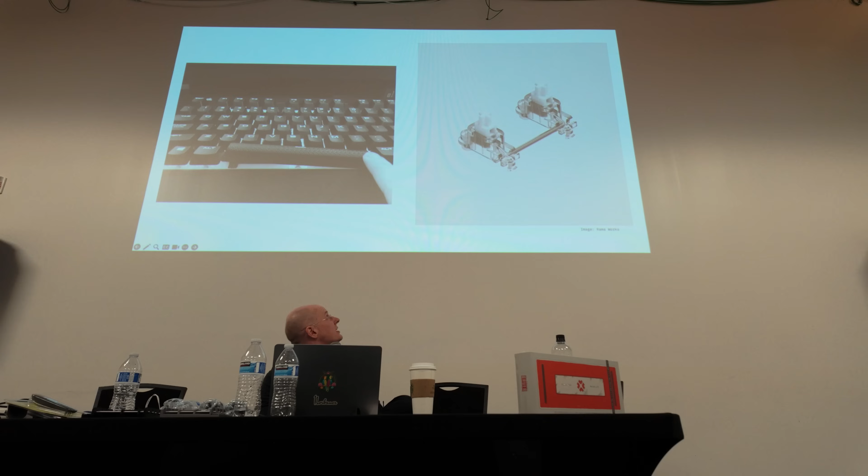So, stabilizers are problematic at many levels. The one in which they're not particularly problematic is just the simple, they do perform their core function, which is anti-seesaw, right? So we have these keys under the ANSI standard, some of which are longer than others. So the non-alphanumerics, like the spacebar, if you were to press on the far end of it, you would get this sort of seesaw effect unless we had some mechanism to counteract that, with the switch in the center acting as a pivot.

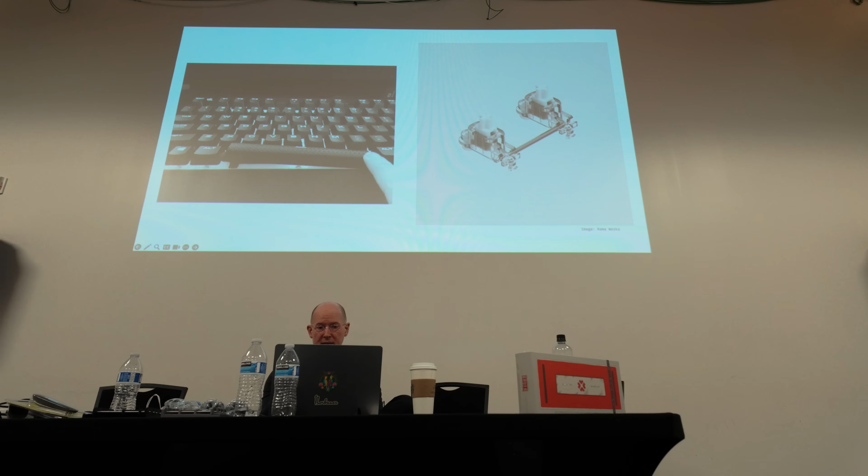And so, there are a number of solutions to this problem. The kind of standard one is this. This is a rendering by RamaWorks of their attempt at an improvement, but it illustrates the basic concept on the other side here of how stabilizers solve the problem. They use a wire linkage between two sliders that plug into the spacebar, and they pull down the other side in tandem with the long end.

And so the problem, as I understand it, and I think about it, is not performing the core function, but merely that they sound really bad. And I think this is the perfect expression of that. Oh, come on. Right? So this is a video that's been viewed millions of times, and it's by our colleague and friend Nathan Taeha here. And it's about what stabilizers sound like in their unlubed, natural stock state. I think all of us kind of feel this way, which is, they rattle and they sound really bad.

And so there's this core irony at the heart of super high-end luxury keyboards. You can spend many thousands of dollars for a Keycult board or these other rare things, and they have all sorts of optimizations in them. They have leaf springs, they have gaskets everywhere, and there's hyper-engineered precision things, but they have, I think, a fundamentally flawed mechanism in them.

And so, there is a kind of solution for this problem, as Nathan talks about in his video, which is we can paint lubricant into the interstices, right? And it's actually not for its lubricating effect; it's for the bulk effect, really. So the hard parts can't slam against each other if we have this high viscosity grease that prevents them from touching in that same way.

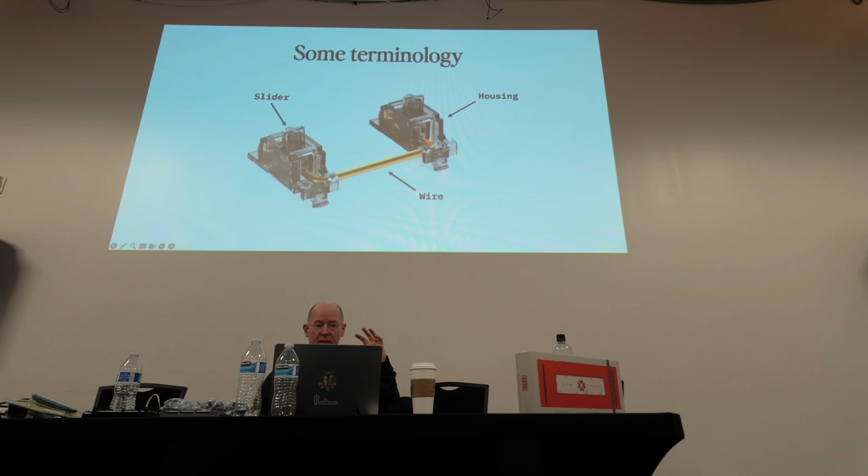I'm sure everyone in this room knows all of these terms, but we have the housing, and then the sliders that move up and down, and then this bent wire in the center, right? And perhaps less well known is this distinction of the types of sound of stabilizers. I'm kind of formalizing a little bit of not totally formal keyboard community terminology here, but I think it works.

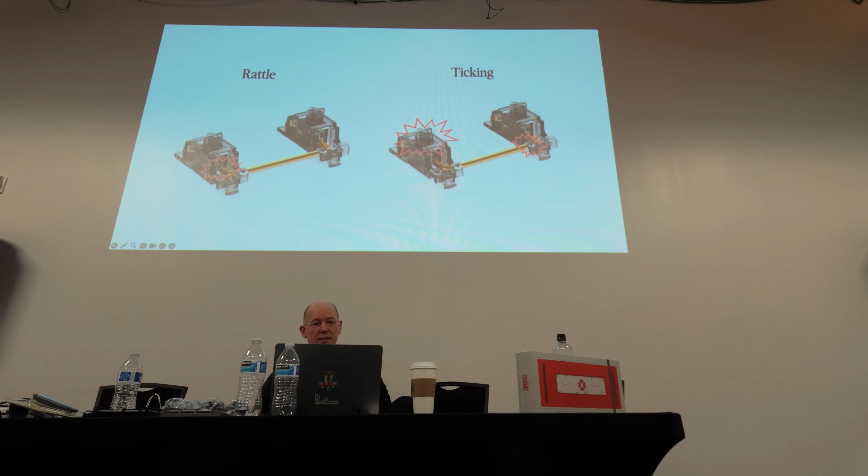So rattle refers to the sound of the wire moving against the interior of the stabilizer, right? And this is the one that we typically think of as the actually very problematic one. It's the louder one. There's also this concept of ticking, which is the more subtle sound of the housing touching against the slider as it moves, and also the wire can rattle a little bit inside of the clip that holds it. And so typically, if you're very serious about lubing your stabilizers, you'll also gently lubricate those interfaces as well.

And another term you hear thrown about on the subject of stabilizers is this idea of loose tolerances, right? So tolerances are an actual engineering term with a precise meaning. What most people mean when they say loose tolerances, though, in the keyboard community, specifically with respect to stabilizers, is that they have loose fits, or there are gaps between the parts, right?

And so it has been commonly held that this is somehow due to manufacturers just being lazy or cutting corners, and that thus one way to solve the problem would be to tighten up those interfaces, to have tight tolerances, which is associated with quality or something like that, and that the problem would simply be solved. My experience, however, is that that's certainly not the case, as we'll discuss.

Another fundamental problem is dimensional variability in keycap width. So particularly on spacebars, thermoplastics are molded at a high temperature, and then they cool down to room temperature, and a shrinkage process happens. And so it's very difficult, especially on long, narrow parts, to control that shrinkage. And so between different manufacturers, the spacing between stems will vary considerably.

This also poses a problem for stabilizers, because you need to be able to accommodate a great variability in keycap widths. So you have this fundamental design tension, right? You want something that simultaneously is tight and loose, speaking metaphorically, right? We want it to move totally freely. We want it to get out of the way of the switch, so that it doesn't actually impart an additional force curve or anything. But we also want it to be tight in the sense that there aren't gaps wobbling around. But you need to have gaps in order to accommodate things like wide spacebar width variation.

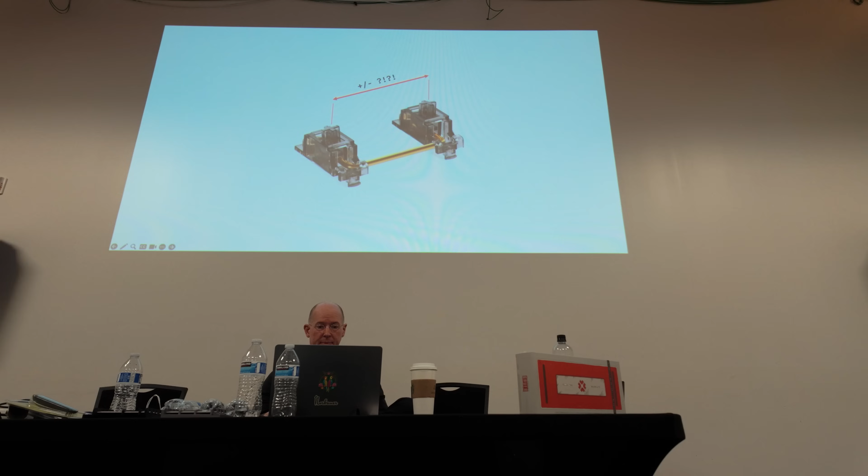In designing, thinking about what I wanted in my ideal stabilizer, I came up with a set of requirements, or annoying things that I wanted to eliminate. First, of course, is rattle and ticking, the bad sound that Nathan was making his face about, right? That's the most important thing, and what I consider to be the unsolved problem in the world of keyboards and stabilizers. And again, without recourse to grease or lubrication.

Why not grease or lubrication is worth considering, and my answer to that is that, first of all, it's very hard to do consistently. Originally this was all in the context of trying to make a good keyboard that I can ship to people, that would come fully assembled and ready to use. And I'm thinking about how in our workshop we do that consistently between individuals who are assembling the keyboard, and also we found that an individual will not even precisely match his tuning of the stabilizer from one switch to the other within a single keyboard. So just from a logistical standpoint, it's kind of inelegant and annoying.

But also it seeps away over time, so it's a thing that can require maintenance, and it's just conceptually kind of an inelegant hack. But we also need to accommodate that dimensional variability, like I talked about, without introducing binding. So again, free and smooth movement, obviously.

And we also can't alter the force curve of the switch, so you don't really want your spacebar to feel fundamentally different than the rest of the board. So, as I say, you want to have the stabilizer get as much out of the way of the switch as possible, while still performing its fundamental anti-seesaw function. And the other thing is tool-free installation and removal of the keycaps.

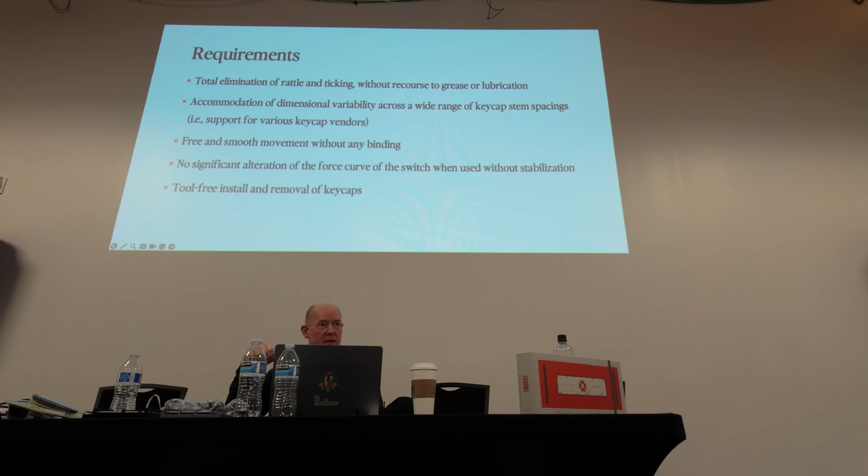This is another interesting problem I never would have considered before delving deeper into these designs, which is when you put the keycap on to the stabilizer, you actually apply a hugely greater amount of force than you ever would when normally using it, right? So you need to have some kind of end stop that prevents that force from going so far that it just deforms the wire, right? Because, for reasons I'll discuss, the slightest deformation of that wire will introduce binding.

So it turns out to be this very complex and competing set of requirements. But initially, this was 5 years ago, I had made my initial explorations into industrial design. I'm designing housings and stuff like that, but I have no training whatsoever in mechanical engineering. I just like making pretty things, and it's driven me down various roads of exploring the technical aspects of these disciplines.

And so, very naively, I'm like, well, essentially a stabilizer is a linear bearing, right? Which is to say something that restricts movement in all axes but one, and allows one translational movement to be free. And I knew about these bearings called self-lubricating bearings or self-lubricating bushings, because one of the issues with stabilizers is the extremely small space that we have available. You can't use ball bearings because people do make ball bearings this small, but they're hundreds of dollars a piece. So 2 times 5 on a keyboard makes it prohibitively impossible.

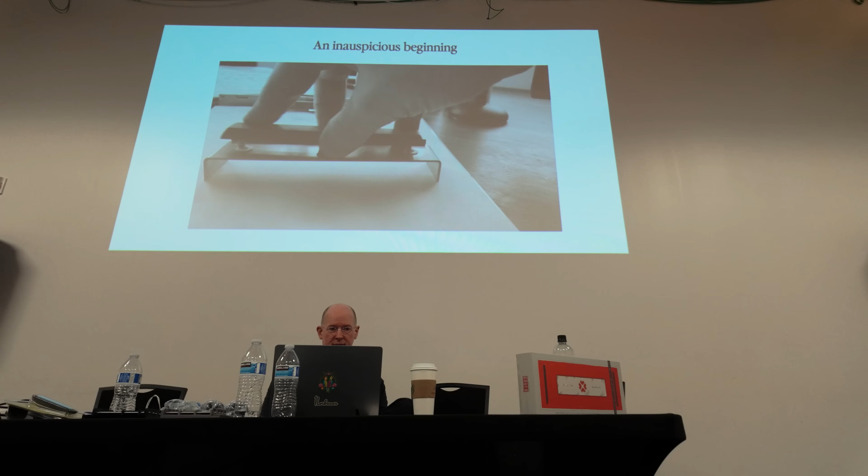So obviously, not in the slightest degree does this function, right? It doesn't pop back up. It doesn't perform its anti-seesaw function. It's just incredibly, incredibly dumb. And of course there were reasons for this, but I didn't understand any of them at the time.

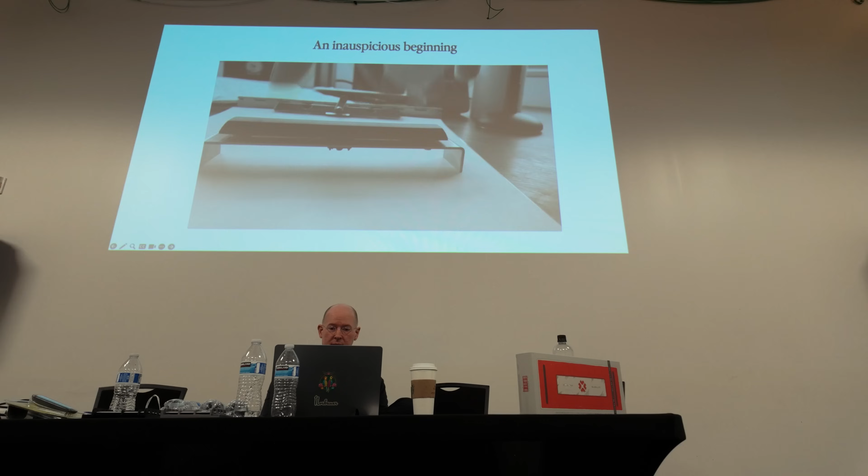There's a really fundamental concept in mechanical engineering, a set of rules of thumb called the bearing and binding ratio. Whenever you have linear bearings, if you violate them, you will inevitably encounter the sorts of problems that people encounter when they try to modify and improve stabilizers, which is to say you get binding, you get chatter, and all these other issues. And stabilizers turn out to be a particularly bad case for the bearing and binding ratio.

Keyboards, we want them to be as thin as possible for ergonomic reasons, but the most important thing for the quality of the perception of a bearing is the length of the slide, and also the moment arm distance. This is what the binding ratio is about. The keycap is significantly distant from the load, and whenever you have that configuration, you tend to get binding in a bearing. So the particular configuration and physical constraints we have to work in make stabilizers an extremely hard problem in terms of engineering optimization.

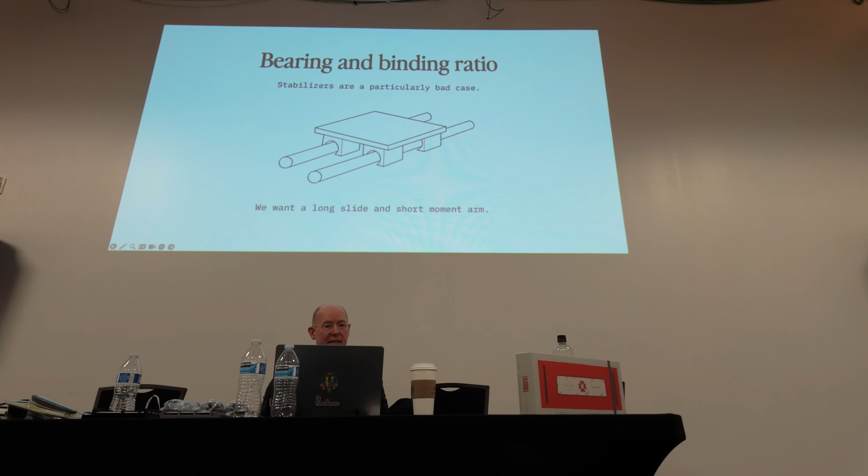And this is what many of my subsequent attempts at a solution would be fighting against without my quite realizing it. Just to again give some context for the difficulty of doing all of this, I don't know if you can read it, but the Proto Labs quote here is for microfine 3D printed parts, and just enough to fit in the palm of my hand is like $1,500 to get a few of them.

And you can't. So I got a Formlabs 3D printer for very rough prototyping, things like the thing at the top right there. That's a test fixture that I used, because every time I would change the stabilizer, the penetration through the plate would change, so I didn't want to manufacture a whole separate keyboard just to test that out, so I have to build custom test fixtures.

But something printed on a Formlabs 3D printer, even though it's pretty much the best consumer grade SLA printer, the surface finishes are way too rough. When the parts rub against each other, because it's resin, they abrade each other, so it immediately starts becoming powder. And you really can't learn a lot from those parts, because it's introducing all sorts of things that wouldn't be present on the production thermoplastics, right?

So if I want to render the features with good surface finishes, I have to use this really expensive microfine process. But even then, we get this abrasion. So I have to paint on, see this skull thing here, a material called XTC 3D, which is specifically for painting on 3D printed parts to give them a high gloss, injection molded like surface finish. So I have to paint that on to get anything like the kind of slide we would get from a production part. But then that throws off the tolerances a little bit, right?

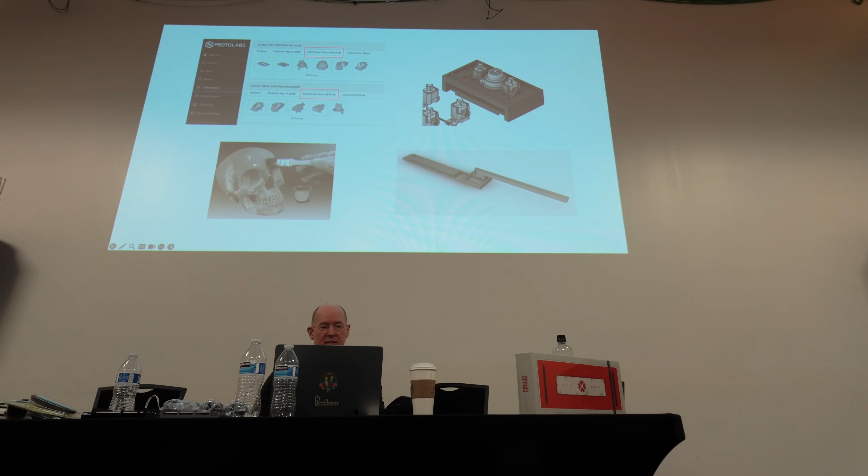And this other thing here is one of the jigs that I made for bending the wires, because every time you change the design, the wire ratio changes a little bit. And CNC wire bending companies, for whatever reason, charge a lot of money for prototyping. It would take like a month and $1,500 to get a set of wires. So it is a difficult set of problems.

One of my first forays into these off-the-wall solutions was materials stuff. I actually hired an acoustics engineer to give me ideas for different types of materials that could possibly dampen the interfaces. There's this company that makes cool test sample parts with interesting features on them. And I found this fundamental, unfortunate relationship between all the thermoplastics available to us. You can either have good acoustics but then have abrasion and drag, or you can eliminate those and then have bad acoustics, right?

So I was looking for a purely material solution, originally thinking, what if we made the slider out of some sort of acoustically dampening material? Like HDPE, for example, it's not rubber exactly, but it is a pretty soft material. So I thought maybe that plus some sort of lubrication that would be easy to apply would be one solution, but it turns out that the parts abrade against each other. The soft plastics' slide performance will degrade over time because of the abrasion. And they also have an inherent drag to them.

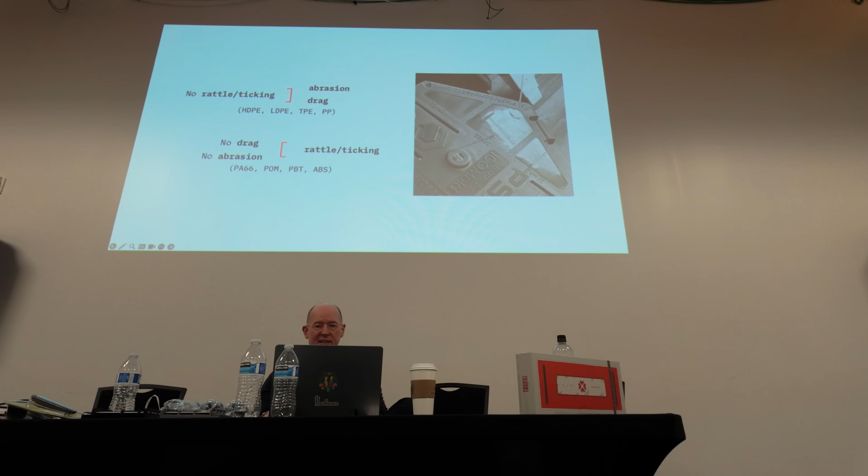You can imagine running two blocks of rubber or silicone against each other. They tend to grip each other, right? So I explored many different material combinations, and they all would bind up or have other issues. I even went as far as getting vacuum cast sliders in a TPE-like rubber, and it was this squeaky, draggy mess against the housing. It sounded and felt awful. Say nothing of the fact that you can't really push a keycap stem onto a rubber cruciform stem. So I essentially abandoned the pure materials solution and started experimenting with mechanical design.

And this is one of my early concepts of using a pin joint inserted from the side, because the idea is that by focusing on a rotating joint, we would be able to have a tighter clearance between the wire and the slider, since that's the primary source of sound. And this wasn't the worst idea, and we used something like it in one of my subsequent solutions that worked much better.

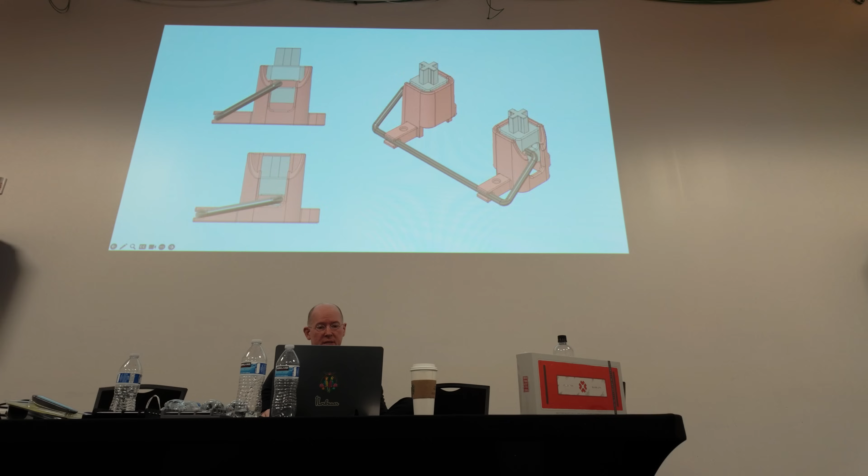But the problem was, in order to get that side entry pin mechanism to work well, we had to have really large clearance gaps between the sliders and the housing, in a way that made the ticking so bad that it became a rattle of its own. This is the minimum gap that I would need to get it to actually freely move up and down. If I tightened those interfaces at all, it would introduce binding.

And this is sort of a general theme, again, from this bearing and binding ratio that I was unaware of, which is that the main thing you're fighting with in existing stabilizer architecture is the issue of binding. Every time we try to optimize for something that we want, it has to come at the cost of binding. Whenever we tighten up the interfaces, whenever we add something that might be a materials improvement, it's such a difficult scenario for the binding and bearing ratios that any of those changes immediately push us right over the edge, because we're hovering at the edge of binding always.

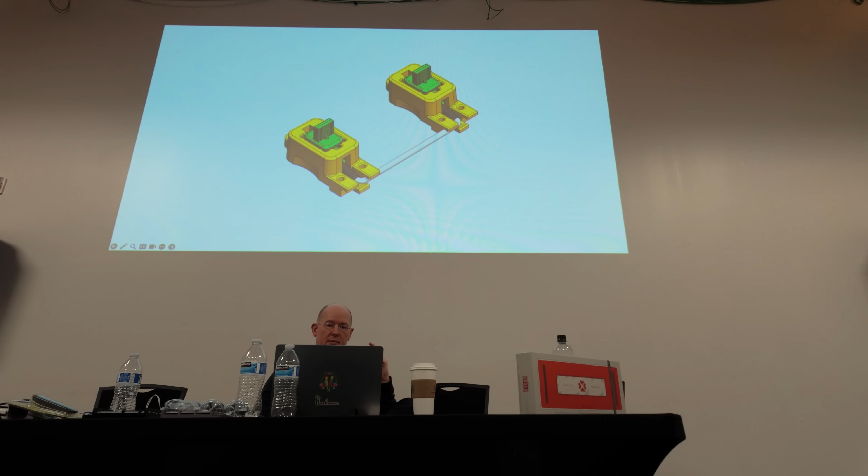So this was a subsequent attempt, so we're probably 2 years into my experimenting at this point. And this attempt was sort of a material solution. The idea was to take the wire and overmold it in rubber. So I've gone back to this normal front entry, standard stabilizer architecture here, and just trying to focus on two things: tightening up the gaps in the way that Staebies stabilizers have done, and softening that interface. There were some problems with this, namely that you still get a little bit of squeak and drag. If you listen closely, you can hear that over-molded rubber moving against the slider.

But particularly around the wire, if you open up the interfaces enough, you can save yourself some of the friction and binding pressure so that the drag doesn't interfere with the keycap popping back up. And you can actually also mitigate the drag and squeak a little bit if you use a dry graphite lubricant, but that kind of defeats the whole purpose of the project, because I wanted to have stabilizers that would not degrade over time as the lubricant wears away, right?

So I'm fighting with all of these problems, but another weird thing was when you actually overmold the rubber onto the wire, it slightly throws out the tolerances of the wire. You can see it's supposed to be 100 millimeters nominal, and it's slightly out of that. And just that amount of deviation is enough to introduce binding.

So, to clarify, when we experience binding, basically what happens is the key just doesn't pop back up, right? It's usually not that you can't push it down. It's that it doesn't freely move back up, or even worse, it does it non-deterministically. Like 1 out of every 10 actuations, you hit it in such a way that for some reason it hesitates a little bit, which is just a maddening problem.

So it seemed that there's this fundamental tension here where you can have 2 of these, but not all 3: acoustics, keycap variation support, and free movement in opposition to each other. And I think Staebies are an interesting solution to this problem, where they redefine the problem a little bit by simply getting rid of support for keycap variation and getting good acoustics and free movement. So essentially they did this tightening up of the tolerances, but they initially said, we pretty much only support GMK keycaps, right? And I think that's one creative redefinition of the problem.

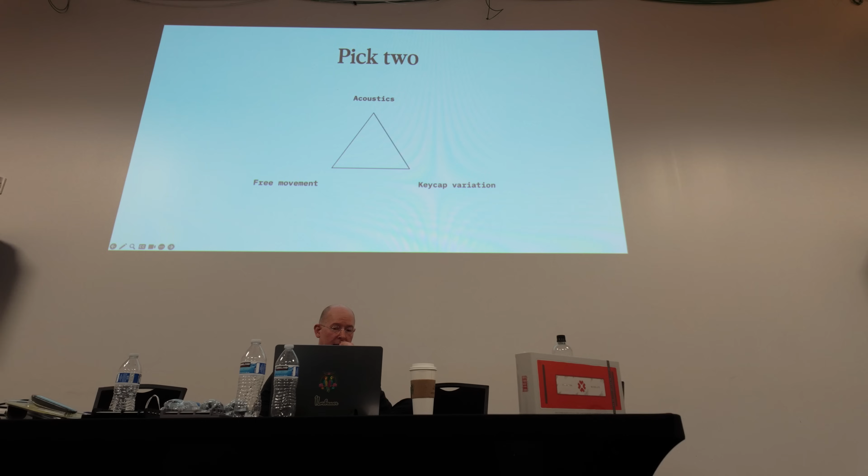I don't know if we'll be able to get sound here. Maybe if I turn my laptop up a lot.

So that's an unlubed stabilizer, and that was my best attempt. Here's another one.

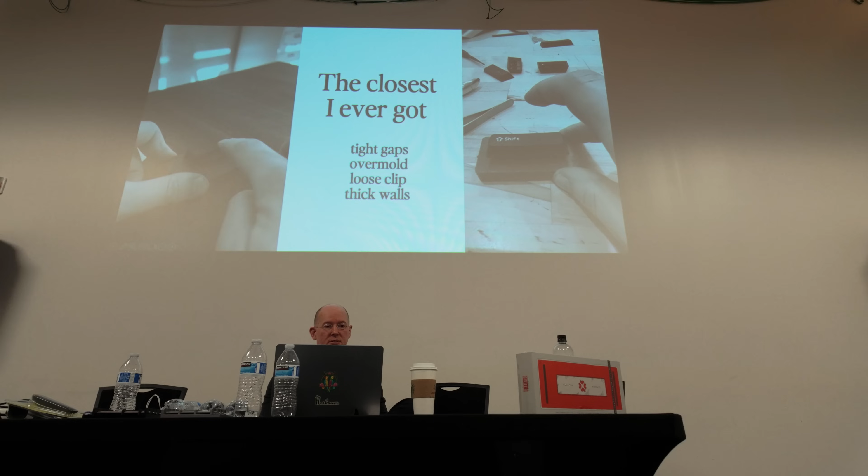So there's really not rattle there as I would define it. There's certainly some ticking, which you can hear. This is the one without the rubber overmold, but otherwise all the tolerances are improved—by tolerances I mean gaps. And this is the one with the rubber overmold. So it sounds pretty good. There are other issues. You can see there's still like a little bit of seesaw wobble.

But by this point, I realized that I actually had a stabilizer that without lubrication performed better than anything you could buy on the market. And it did actually more or less work. So I had to ask myself, is this a sufficient solution to the problem? And it's like, better was not quite good enough for me.

And this is just sort of really like a character flaw in my way of approaching projects, I suppose, in that my goal was to make a no compromises keyboard. And it was greatly improved, but not a no compromises stabilizer.

So I spent a lot of time trying to figure out how I wanted to deal with this problem. And I lost a lot of sleep about it, and I held up the release of the keyboard I'd been working on for a really long time, just thinking there must be a better way to solve this problem, and realizing it fundamentally came down to my limitations as someone without a background in mechanical engineering.

And after months of agonizing over this, I stumbled into a video about compliant mechanisms. A compliant mechanism—they've actually been around for a long time, but it's kind of all the rage now in mechanical engineering because of 3D printing, since 3D printing has made it possible to prototype these types of mechanisms much more easily.

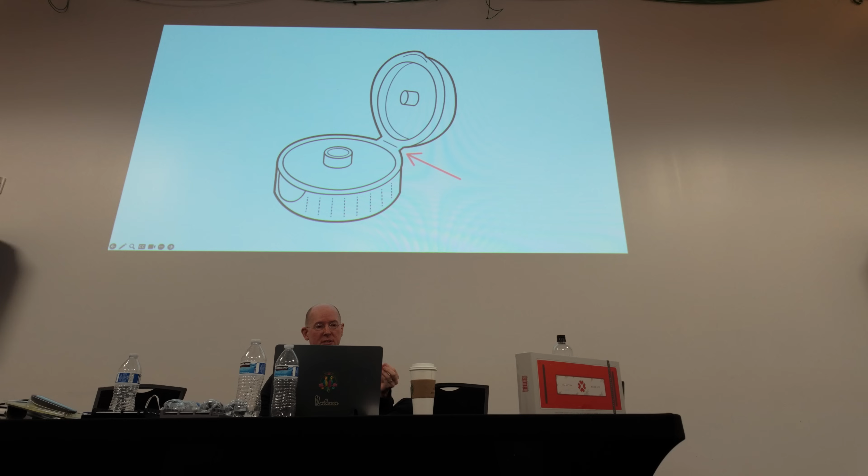And if you think about it, this is actually in some ways the problem with existing stabilizers. We have multiple parts that, because they're separate, can sort of bang against each other due to the clearance. In theory, compliant mechanisms tend to solve these problems by eliminating separate parts and getting the mechanical movements you want through the inherent flex in the material.

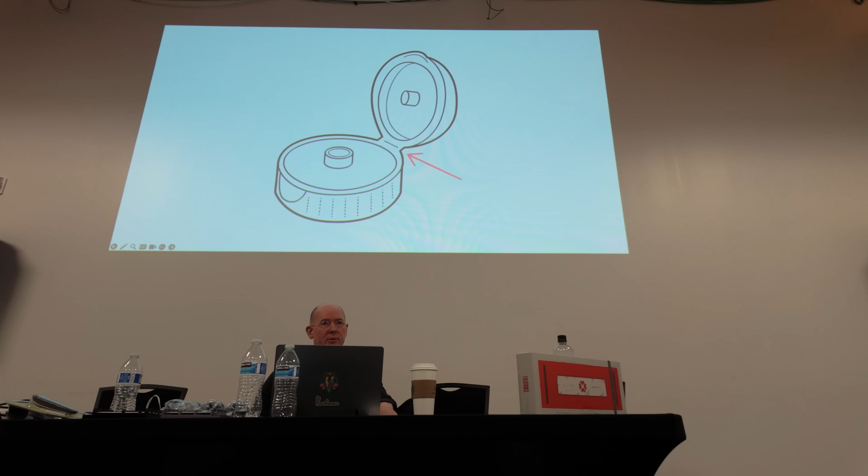So I found a company that claimed to specialize in compliant mechanism design. They're actually very difficult to find because most people doing this kind of work nowadays are still in academia. But I did find a company to do a concept development for me. They were very, very expensive—they charged $12,500 to produce what is essentially this animation for me.

And the thing that they didn't realize, and that I didn't realize until later, is that this would have a variable force curve. Because of the compression of the material at the end of the switch travel, you would get this kind of squishy, jelly-like feeling at the end of the travel, which is definitely not something we want—the stabilizer should essentially disappear along with the switch. So obviously I didn't pay them the other $12,500 they wanted to go to the next sprint, because they didn't produce anything that was a viable prototype.

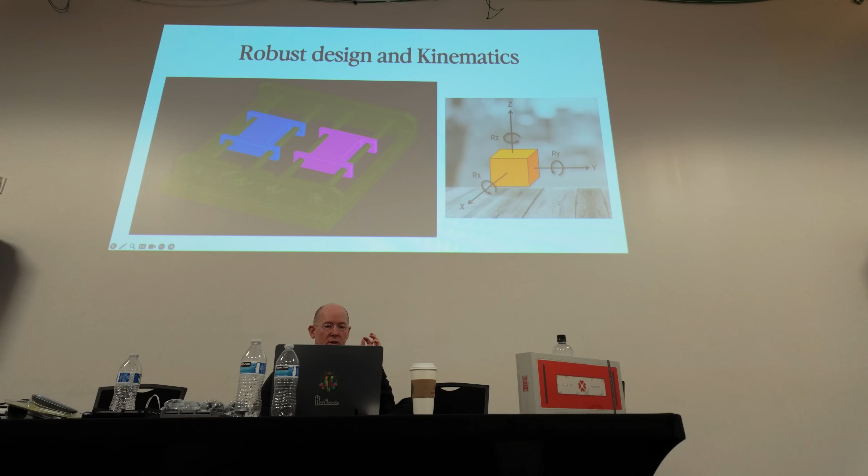Oddly enough, most formally trained mechanical engineers don't think this way. They've told me that about 90% of the designs that come to them for improvement haven't had a kinematic analysis done. People tend to start with the physical embodiment and then work their way back to the kinematics. They simply go at it the other way around—engineering from first principles about what we want to achieve, and then creating the absolute minimum geometric constraints that produce that physical movement.

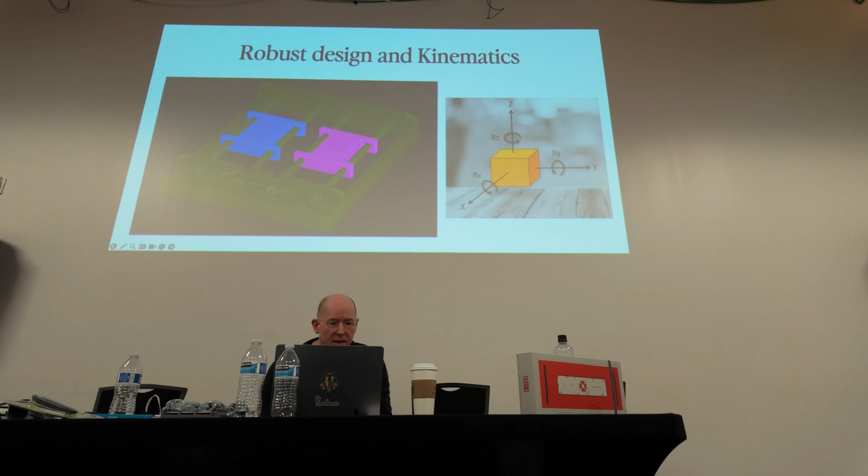You can see here a 3D model of what this test fixture is—there's a blue one and a magenta one. You can see that there are different contact faces between the two examples. The magenta one is over-constrained, which is to say it was designed without taking kinematics into account, just imagining a way to achieve the slide we want, and often doing that in a redundant way.

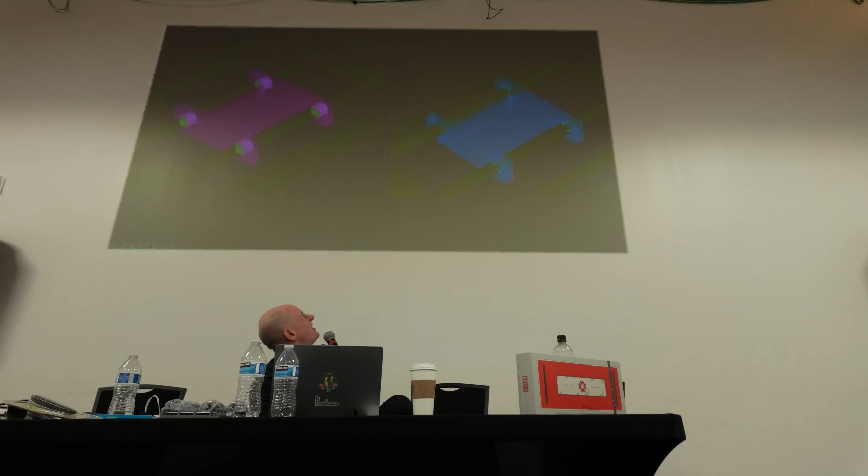I won't get too much into the details since it's kind of arcane and I'll probably get it wrong anyway, but in order to achieve the movement we want, we actually only need what is present on this blue slider here. There are two sets of four contact faces that prevent the slider from moving in the X and Y directions. Then, on the top right, there are only two contact faces there.

Together, these sets of faces comprise the minimum amount of constraints that you need to get this sliding movement and no more. The naive way to design it is to just have 4 sets of cylindrical cutouts, as they do on the magenta example here. That's fine under ideal circumstances—if you have perfectly manufactured, super high precision bearings, lubrication between the interfaces, and the bearing ratio is good, then the magenta one will actually work, as you can see in both of these cases. But the question is what happens when circumstances become suboptimal. And with keyboard stabilizers, everything is extremely suboptimal—the bearing and binding ratio and so forth.

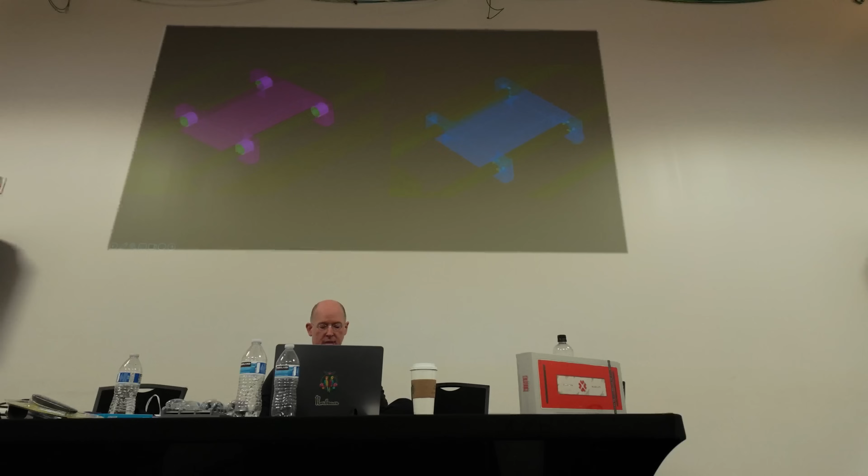Over-constrained designs will fail when things become suboptimal. This test fixture has a little switch on it, where when I move it, it takes the 2 rods, which are perfectly parallel, and moves them ever so slightly out of parallel. I'll show you what happens. If I move the rods just slightly out of parallel, one moves and the other doesn't. This is equivalent to the magenta one because it's over-constrained—it has those 2 cylindrical cutouts. This other one actually moves just fine.

That's because it only has the bare minimum number of contact faces that are required, so it is robust in that sense—robust to variation. This variation is exactly the type of thing we encounter when manufacturing something with injection molded parts, and also when you have a really difficult bearing ratio situation.

When you do the kinematic analysis of that design I had, that like 90% good design, it actually fares pretty well, and it's equivalent to standard Cherry stabilizers. I didn't reinvent the kinematics in any way. Standard Cherry stabilizers, or the ones I created that were a slight improvement, get a score of 5 on the RD8 scale of engineering, which is considered world-class engineering according to their scale. But the problem is this is just a very challenging problem because of the bearing and binding ratio, so 5 isn't good enough—you actually need absolutely perfect to surmount these other issues.

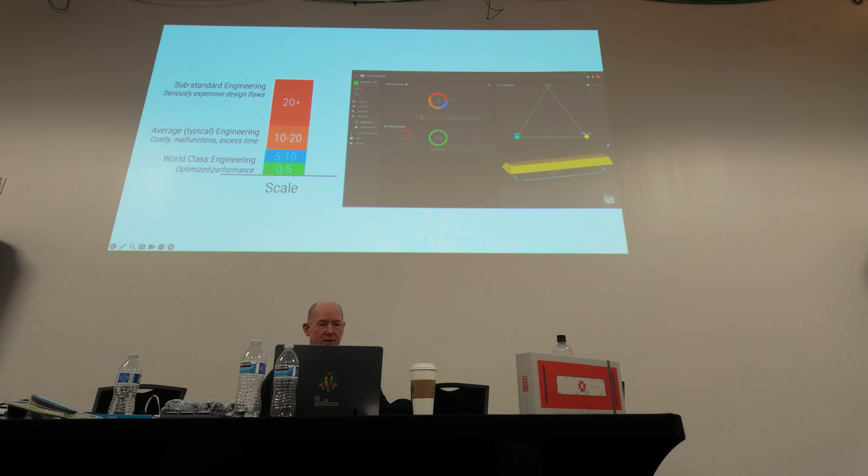The standard architecture of stabilizers is kinematically over-constrained. There are a number of redundancies in the constraints, particularly in these rails here, but the wire constraint is also redundant. An important part about these over-constraints is they're also spaced really far apart.

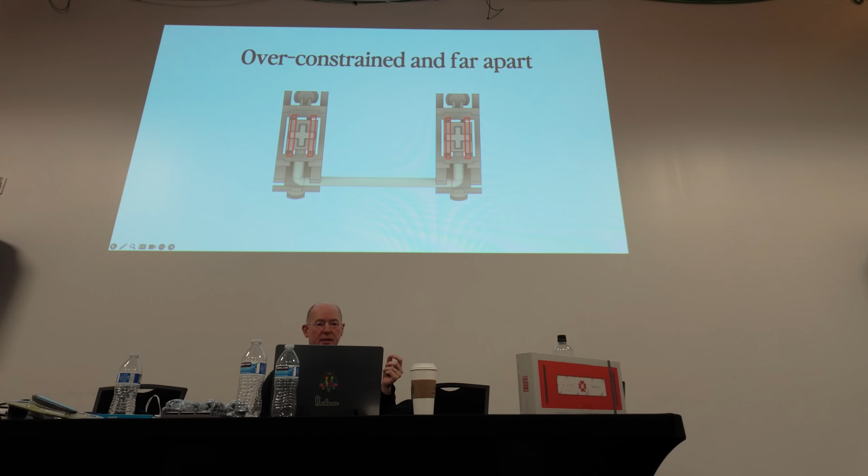One principle I learned from RD8 is that in manufacturing, if you hold the difficulty of manufacturing constant across different parts, it's possible to hold much tighter tolerances over smaller dimensions. It's much easier to make a 1 millimeter part plus or minus 0.1 millimeters than it is to make a 300 millimeter part. In retrospect that seems obvious, but I never really thought about it in terms of the level of precision that's possible. So as a design rule of thumb, you want to have constraining features over as small a distance as possible. But in the case of existing stabilizers, it spans a relatively wide distance.

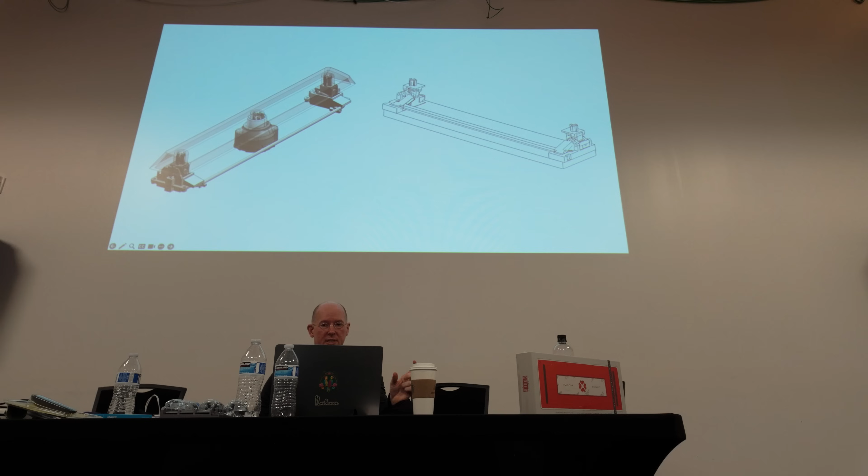After all this analysis, they came to me with two ideas for how to create kinematically optimized stabilizers that would score a 0 on this scale—two pretty radically different proposals. The one on the left is essentially a slight nuance on existing stabilizers; it basically deletes the over-constraints and moves the interfaces closer together, as I'll show in subsequent slides. So it's not a radical reinvention, just an optimization.

The second one is a radical reinvention, involving the use of pin joints. It has, I think, 21 individual parts as they designed it in this initial concept they presented to me. They said the one on the right is actually the optimal solution from a mechanical engineering perspective, but it carries a lot of risks—first of all, I had never worked with metal pin joint parts. It obviously looks very mechanically complex, and they weren't sure how to simulate it. There were some complexities around the pin joint solution.

The one on the left they felt confident would be one that they could solve in like a month and prototype pretty easily, and it would be a massive improvement with a total solution to the fundamental problem of rattle, which I'll show in a subsequent slide as well.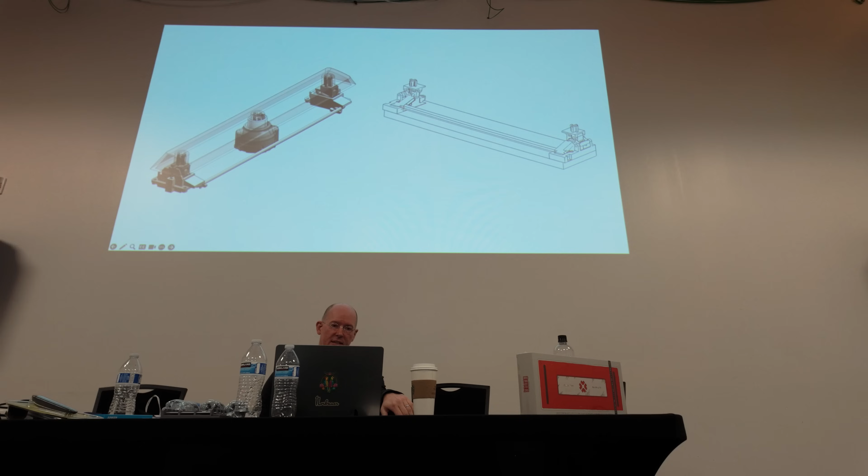And so I agonized over this for quite a while, and I decided that I'm already $60,000, $80,000 into this project, and probably 4 years at this point. And so the idea of being done in a month sounded really good to me. And so I decided let's give the left side a try because I don't want to find myself in an endless cycle of design iterations if we go with the right one.

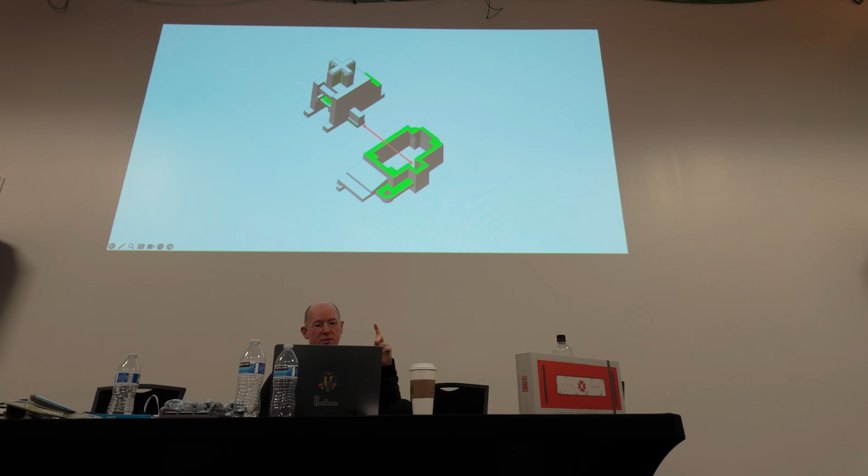So this is what that looks like. I call it the tongue and groove stabilizer. And you see here this is really the core of the difference. Remember I said that the long distance is one of the most important problems we need to solve. So instead of having the constraining features span the entire slider length, we instead compress it down to this tiny little tongue and groove interface, which I think is about 1 millimeter or maybe less than that. And as a result of using a much smaller dimension, we're able to get much smaller gaps.

Because these are injection molded parts, due to the tolerances associated with them, it's not a 0 gap, but it's essentially an almost 0 gap between the slider and the housing. So this minimizes the possibility of ticking. It also perfectly provides the mechanical constraints that we want to get the movement that we want. And also it optimizes the bearing ratio as much as is possible for a linear sliding solution.

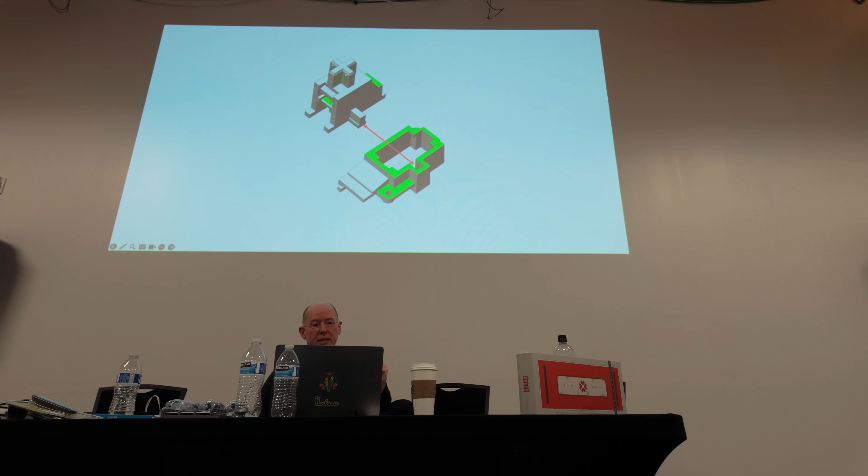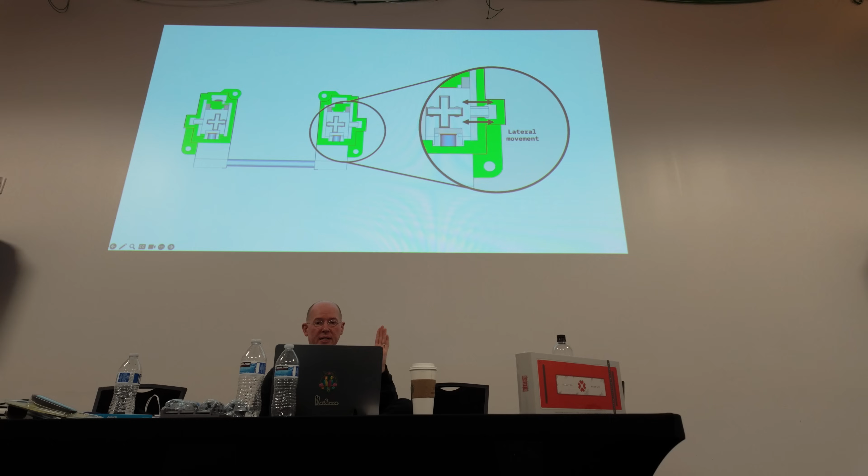And it also, importantly, because of the way the geometry works, allows those sliders to move in and out to accommodate dimensional variation in keycap widths. And you can sort of see in that zoom-in circle that we'll still get the constraint that we want in the right axes, but we can move freely laterally. So also a very smart solution to that.

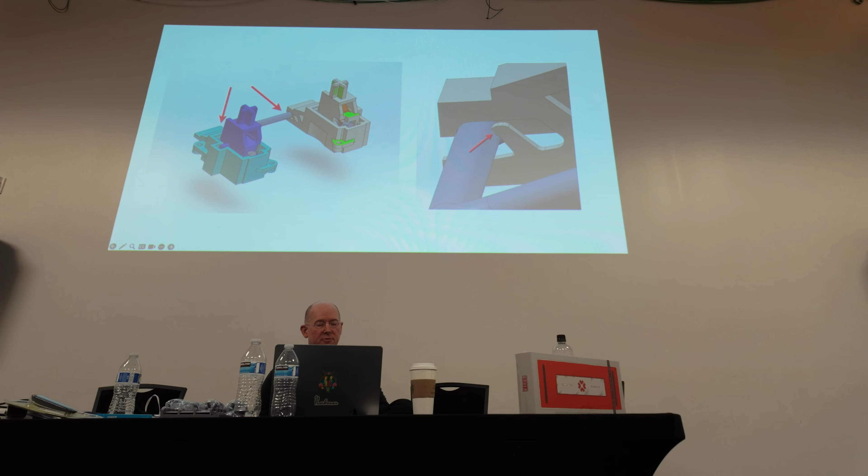And in other places we have a sort of compliant solution to issues of rattle or ticking. In this case, you have this little plastic beam in the right-hand picture that presses on the wire. And it's actually very hard to design these beams because you have to use a lot of simulation to know how to push on the wire just enough so that you keep it always in a 0 clearance state, but where you're not actually applying friction and keeping it from moving. But these guys know what they're doing, so they figured all of this out for me.

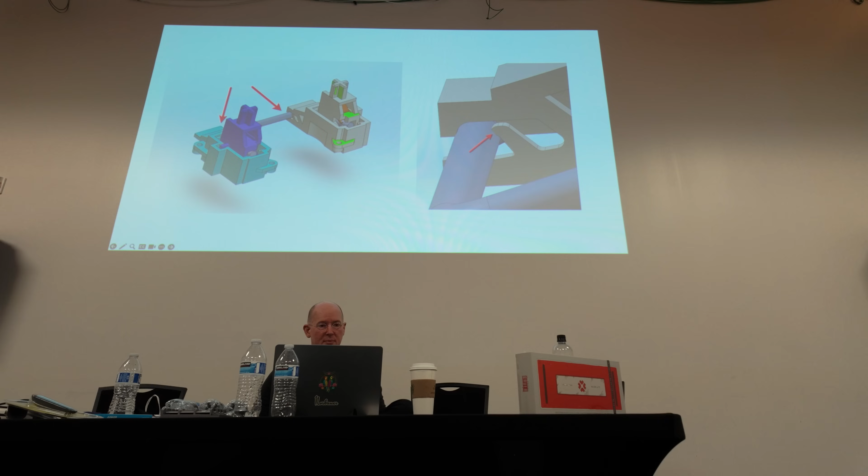And so it's impossible for the wire to rattle because it's always in this preloaded state. Preloaded is a specific term related to bearings when you are applying a perpendicular force to the bearing to prevent play or rattle. Again, it's a concept I'd never heard before, but very straightforward and well understood for people who know anything about mechanical engineering. So we applied the same concept to the most important part, which is the play between the wire and the slider, right?

Because that is a more important part, and because there's more forces involved, we don't actually use a molded-in plastic compliant beam. We actually use a brass spring that's formed into that shape and is popped into the slider. That brass spring then presses down on the top of the wire and presses the bottom of the wire against a feature in the floor of the slider. So again, through the entire travel of the slider, there's never any possibility of gap because we have this spring pressing down on it.

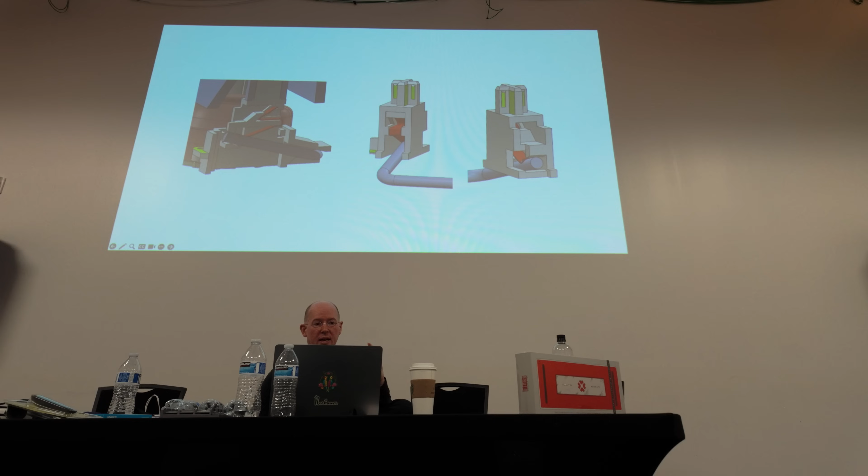Now, if we had tried this solution before we kinematically optimized the design, it would have definitely introduced binding, because it does actually introduce some forces into the system. But because we bought ourselves some breathing room with kinematic optimization, we were able to do these things that would optimize for the things that we cared about.

And this video here is a really close-up view of what's happening with the wire inside of the slider. It's a little bit rotated weird, but on the top of it you can just see the spring pressing down on it. And you can see that through the entire travel, as we go really slowly, there's no moment at which the wire is not perfectly in contact with the spring on the top and the floor of the slider on the bottom.

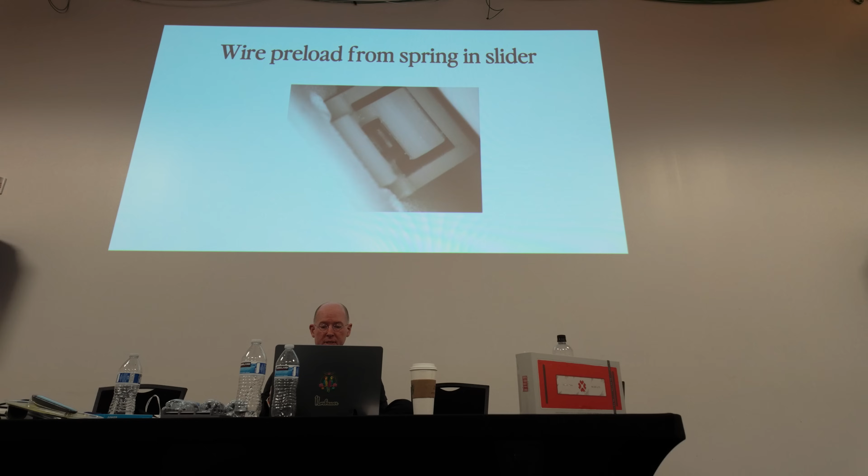So this all worked really well. It definitely doesn't rattle. This is a 3D printed prototype of that concept. And if you hold it so that the fixture is tight, there's no rattling or any sound whatsoever. All the parts are really tightly preloaded. And the only sort of flaw in any way is just the most minuscule gap between that tongue and groove interface. So it worked really great.

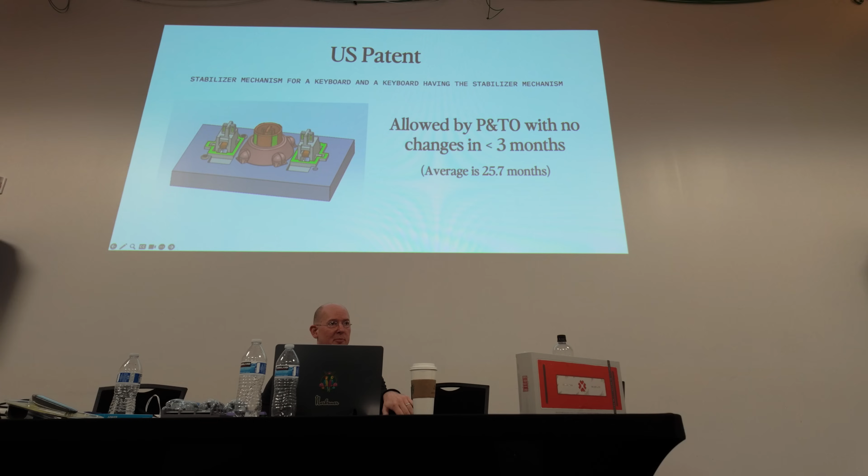We applied for and got a patent on this solution. It was approved in 3 months, where the average is 25.7. For some reason, that pleased me greatly. I was very pleased that we were able to solve the problem, especially given that I had worked on this for years at that point. But these R&D guys were like, yeah, sure, we can do this in our sleep, and in 2 months came up with something that was actually quite amazing.

But you'll notice that this is only a 3D printed prototype. It's not a production part. Because I started thinking again, I found myself coming back to this 90% solution thing, right? I'm like, it minimizes ticking, but it doesn't completely eliminate it, right? So what's the point of making the perfect stabilizer if it's not absolutely, absolutely perfect?

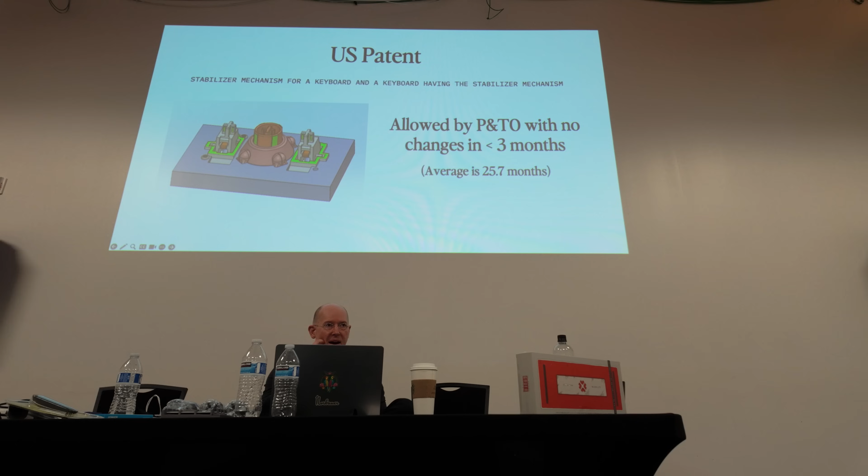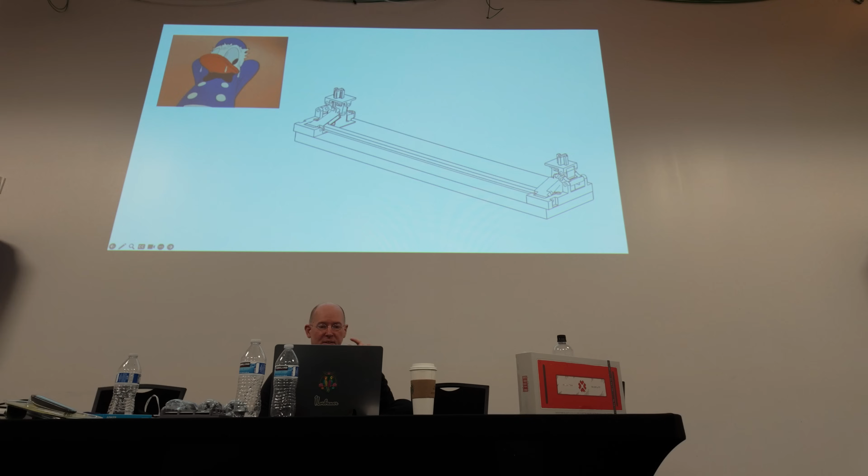And so I started having these dreams about the pin joint stabilizer, and I couldn't stop thinking about it. I was literally waking up in the middle of the night wondering if we might have missed the perfect solution to the problem. And again, it's holding up this keyboard that I've been trying to release for years, and it's the last 10%. The keyboard was 90% done, and then I had a 90% done stabilizer, and then another 90% done stabilizer, and I keep zeroing in on my optimal solution, but somehow never quite reaching the goal.

So, I was thinking about Steve Jobs, and on many projects like the iPhone, Apple Store, Toy Story, on the eve of the release of these products, at great business cost, he frequently would pull back and be like, wait a minute, this is not exactly perfect. What's the point of doing a project like this unless we can make it as good as we possibly can? I just happened at the time to be reading the Walter Isaacson biography of Steve Jobs, and he talks about that. And I'm like, okay, I guess maybe we need to think about pin joints again.

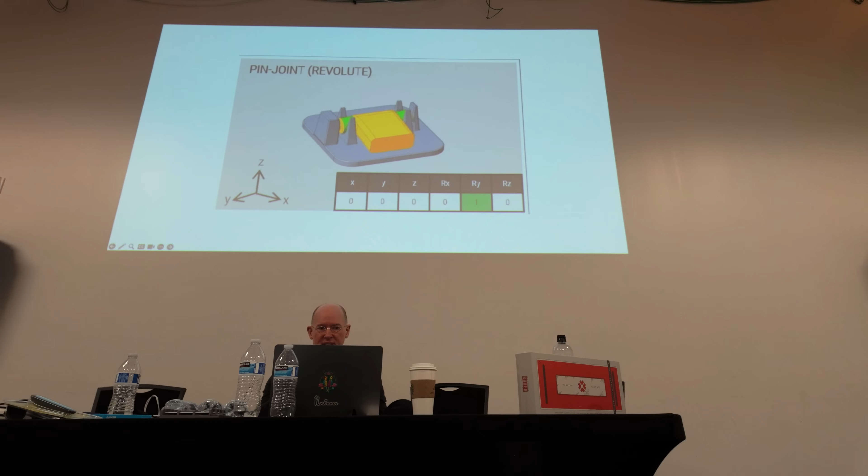And it turns out there's a rule of thumb in kinematic design and robust design, regarding the 13 different types of joints that you can create to create mechanical movements. The rule of thumb is when you can use a pin joint, do. There are a lot of reasons for that, but specifically in our case, a pin joint would allow us to use a stainless steel precision ground part for the pin. And that would radically transform the tolerances we were able to achieve, right?

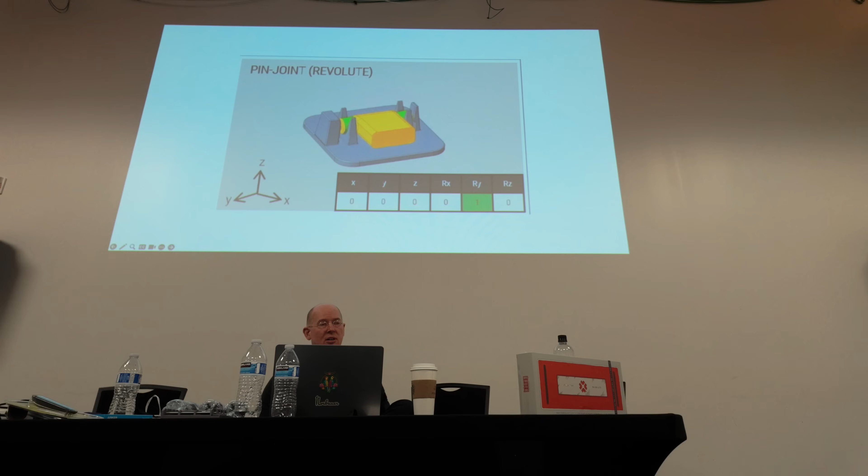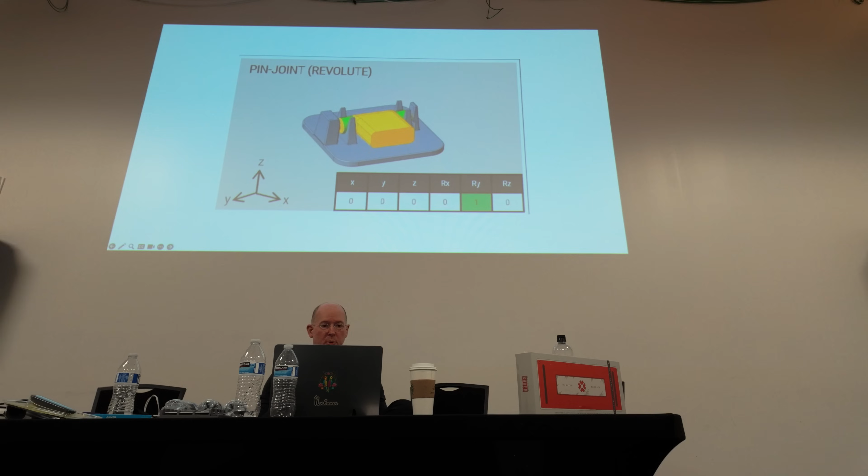Pins are stainless steel cylinders that are rolled and then ground. And so they're almost infinitely more precise than what you can achieve with an injection molded part. As a result, if you create a joint in this way, you can have effectively a zero clearance joint between parts, and you also get really good friction, because metal sliding against thermoplastics is very favorable in terms of friction compared to thermoplastic against thermoplastic.

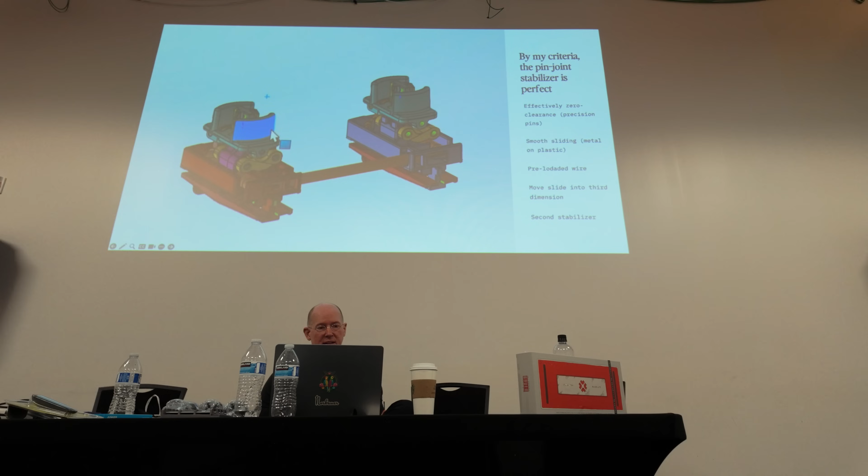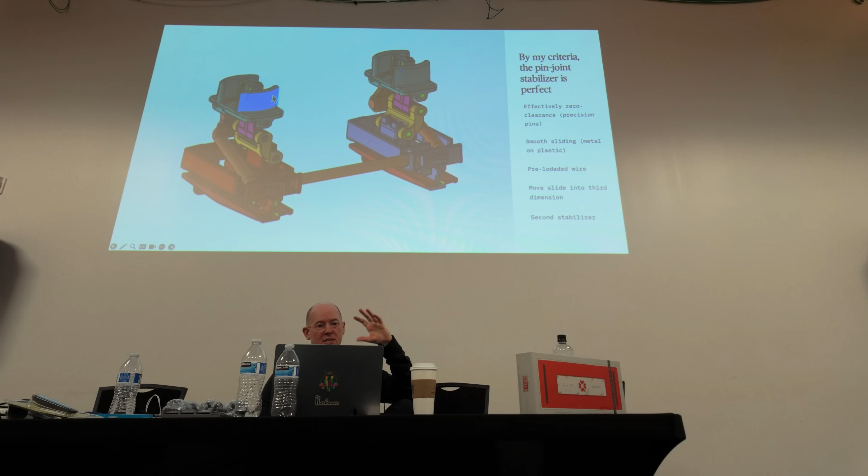So this is the design that they came up with. It's this unbelievably complex watchmaker-like design, but it has a number of really cool features. I think the coolest part is it fundamentally redefines that linear bearing problem and projects it into 3D space. We've essentially taken the bearing and made it longer by creating something that collapses in on itself. We've effectively lengthened the slide by creating these features that fold down onto themselves.

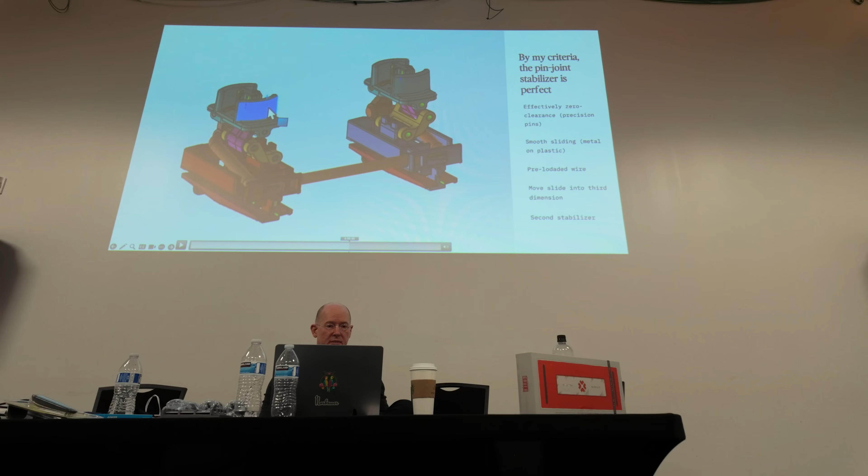Again, bearing in mind the principle that the longer the slide, the better the quality of the experience. And we've molded in these end stops and everything. And the result is we have these very precision fits between the pins, which, like on the right side, you can see in green; those are stainless steel, and they get press fit into the joints. And so as a result, there's no play whatsoever. It very precisely and tightly fits.

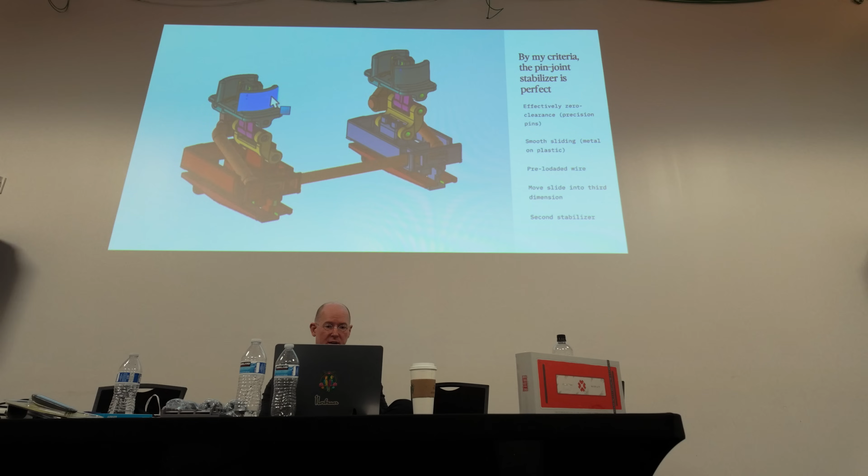But the result of this whole change of interface is that we have 1/10 of the amount of friction that we had in the old tongue and groove interface, which was already very optimized, and it kind of just entirely gets around the bearing ratio problems. It also has the added advantage that essentially we've added a second stabilizer, so it actually performs the anti-seesaw function better than traditional stabilizers.

So you can see this a little bit better here from the side view. There's kind of two transverse stabilizers that operate together, and that one at the back actually ends up stabilizing better than the sort of conventional design. So we get smooth sliding. There's one case where we couldn't make everything pin joints, and so here at the front you see these little two beams. Those are preload beams like we had in the last design. So they just gently press on the wire to ensure that it's always in a state of zero clearance. So there's no possibility of ticking there.

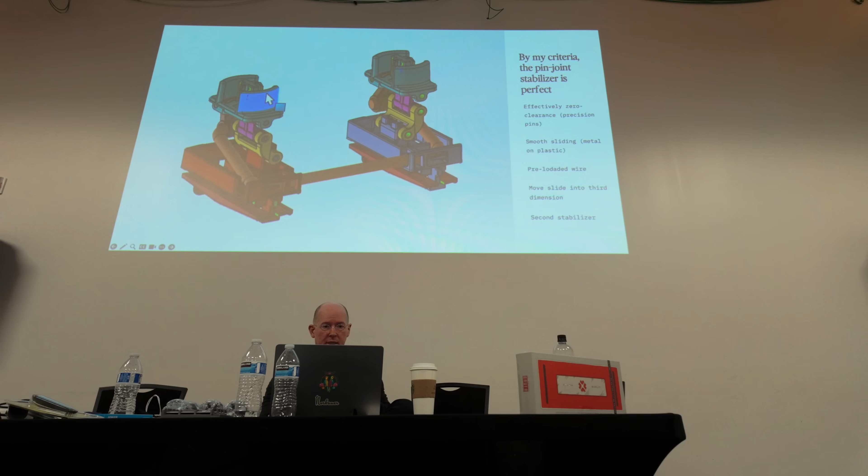And so, this is the result 5 years later, and I think at this point into the 6 figures of costs. But it is a kind of solution to the problem. It's a way of getting around this bearing ratio issue that's fundamental to why stabilizers are extremely hard to design. It comes with some significant downsides. One of these takes like a half an hour to assemble. There's a lot of tiny little parts. You basically have to do it with a microscope.

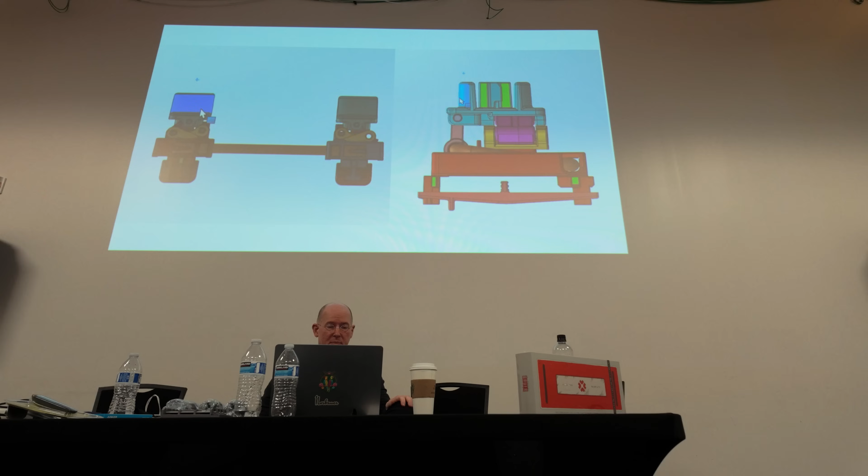There's 21 parts in the whole assembly, and each slider tower is a 1 cubic centimeter space that we have to pack all of these tiny parts into. So there was a lot of design time, experimentation, and iteration that went into getting all of the functional features that we needed, like those end stops, into this incredibly tiny space.

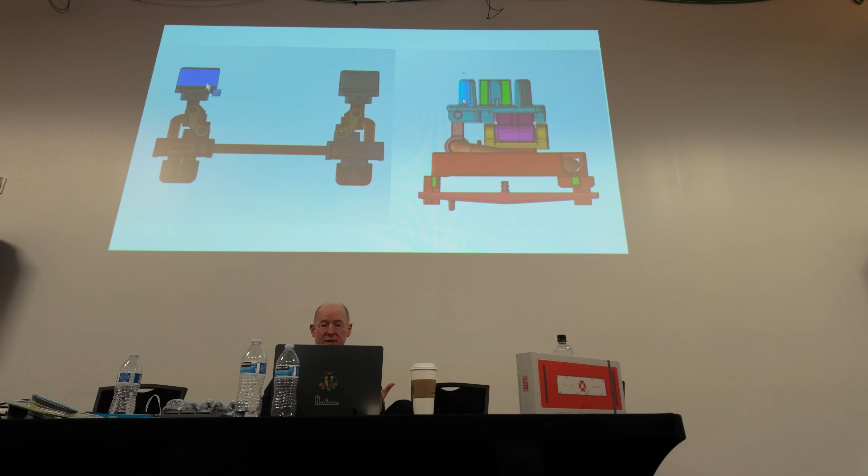But the result is a stabilizer that, to my view and by the criteria I originally established, actually perfectly does everything that we want. We accommodate dimensional variability without any difficulty. We have a perfectly smooth slide. We have no rattle. It's all zero clearance, very smooth. It doesn't change the force curve. And so this is the Norbauer stabilizer, as it were, a pin joint stabilizer that is a different solution to the problem.

And it's been kind of an arduous process to get here, but had I known how difficult it would have been, I probably would never have set out on the project. But now that I'm here, I'm kind of glad that this sort of random walk down different solutions led me to a place that just seems pretty conceptually cool. So that's been my project. I'm happy to answer any questions if any of that isn't clear.

What's the cost for making one of these? I don't know exactly. So what I have here, and you guys can certainly play with them afterwards, is test fixtures with parts from a test mold. So they're actually production-ish thermoplastics, right? And so it gives you a sense of the performance: one is an unlubed traditional stabilizer and one is mine, that one.

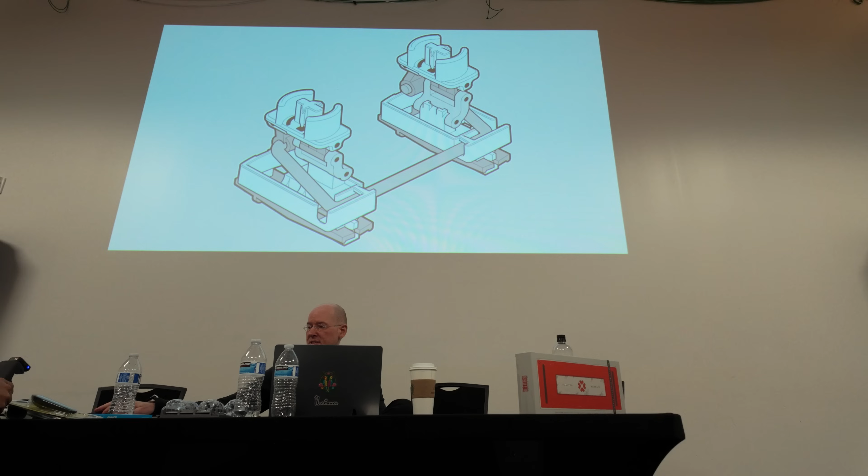Oh yeah, sorry, I don't know if you can hear in the room, but that's a normal stabilizer, that's mine. I realized just last night I shouldn't have made these housings out of aluminum because it actually imparts a little bit of ping, like most keyboards with integrated plates. So please ignore the ping, but you'll notice that rattle is not present, nor is ticking. And I think one of the most telling ways of testing a stabilizer is just to hold it up and shake it and hear if you can hear any movement, and you can't with this one. And then of course with the traditional unlubed stabilizer, there's a ton of noise.

At any rate, to answer your question, I've gotten the test molds made. They alone were very expensive. But the production molds are something we're working out at this point. They are going to be fantastically expensive, particularly because the housing, for example, you can see a lot of the details on there require side actions, particularly the formation of that compliant beam that presses on the wire, which has to be a very tight tolerance part, because if it presses too hard, it starts imparting friction and slowing down the movement. And if it doesn't press hard enough, then you'll get ticking. So we're working it out, but I'm hoping in the next couple of months to be able to move to production tooling and then know how much it's actually going to cost.

Are these solutions going to be easy to, say, retrofit into existing MX and electrocapacitive designs, or are they going to require boutique PCBs, plates? Yeah, so originally I designed this for my keyboard, and one of the requirements that I didn't mention here because it didn't seem important in general terms is that it actually had to clear my switches, which are bigger than normal Cherry MX switches, right?

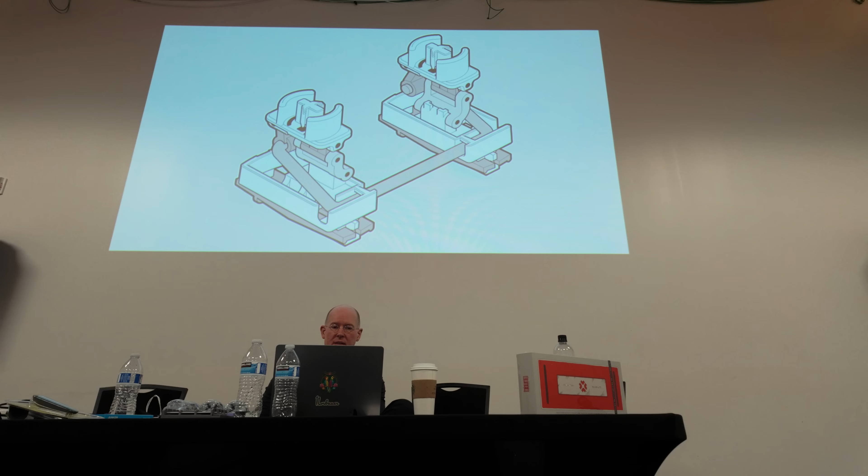One thing I'm looking at right now is building a test fixture to actuate these over hundreds of thousands of actuations and see what happens. But as I say, this was kind of a child's play kind of project for the guys at RD8. So they're very comfortable with the performance and how they think it will behave over a long period of time. And so, I'll take their word for it.

Of course, as usual, if there's something wrong with the performance of it, I would probably just fix it and replace it. But some of these things you never learn until you actually release it into the wild, like the ways in which people will abuse something, or things that you need to be robust to. So my goal has really been, let's solve this problem and get it out into the world as quickly as possible. But at least in theory, this should be better than other solutions for that reason.

Back there? So you mentioned that the perfect stabilizer was the last hold-off before your perfect keyboard came out. Right. Now that you've solved that, about how far away is the Norbauer perfect keyboard?

Well, bearing in mind that perfect is an extremely subjective thing, right? But it's my expression of the idea of perfection.

We're probably going to do a pre-order offering to some existing clients in the next few months, and then the goal is to try to ship it maybe the end of the summer, the fall, and have wider availability after that, so before the end of the year.

We're finally super close, and there are many things I haven't even talked about in this talk that went into the making of that keyboard that were not as hard, but in similar ways hard to this.